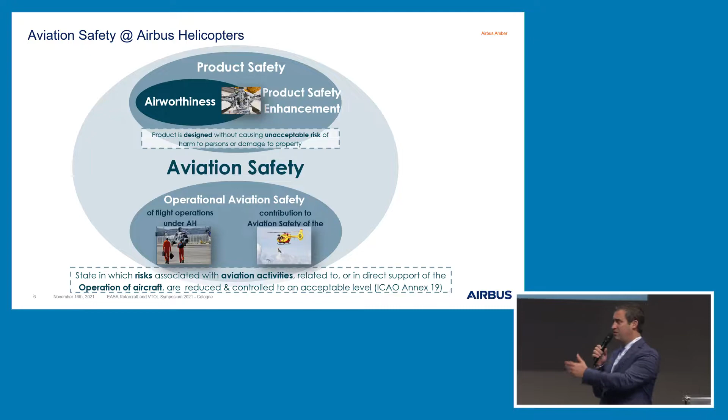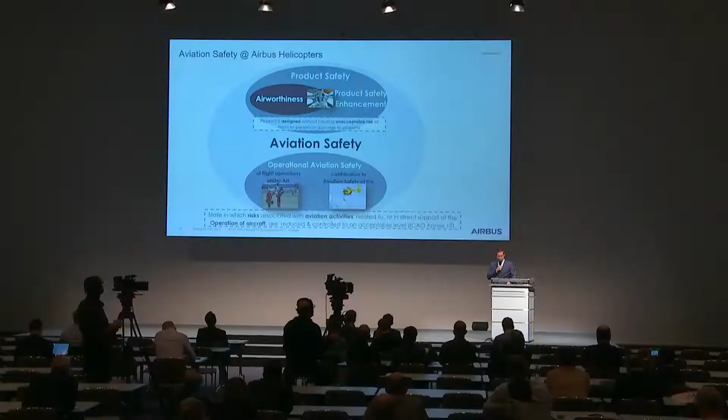We have started company-wide to deploy a safety management system over all approved organizations, as well in advance of the regulations which will come now as well for Part 21G and Part 145, or published. And this is really internally. And externally, to define a roadmap, how we could work with our customers and operators in the field.

If you discuss the strategy, you have to discuss as well your ambitions, your vision. In general, we defined five. In the center, Airbus Helicopters is worldwide expected as a leader in rotorcraft VTOL aviation safety.

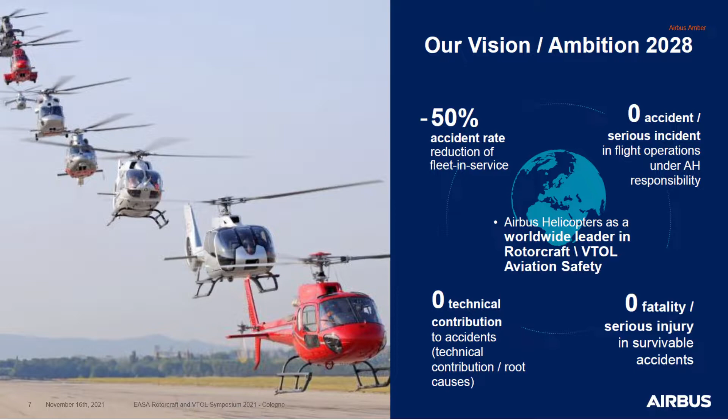One of the actions here is we are represented in the Rotorcraft Committee, in the European Safety Promotion Network Rotorcraft, in the Vertical Aviation Safety Team, and as well with our Aviation Safety Network. We have worldwide, in all 26 customer centers, aviation safety representatives who contribute regionally in safety activities. We would like to play our role in this game.

Then if you look at the other ambitions on the bottom side, the classical OEM responsibilities: zero technical contribution to accidents, so zero technical contribution and root cause. This is clearly our ambition for product safety. And zero fatality and zero injuries in survivable accidents.

Thank you, Peter, you mentioned the crash-resistant fuel system. It can't be that there are fatalities in survivable accidents. That is one of the reasons, and Peter shared as well a little bit our frustration, that we developed a solution for the market. We offered it without a margin and even put on top a training package to promote it.

And now we would like as well that every stakeholder in the industry takes the responsibility that we could contribute to this ambition. Then on the upper right, you see the zero accident and zero incident in flight operation under Airbus Helicopter responsibility. This is our ambition linked to our internal safety management system deployment.

And then you see here the link to the EASA roadmap, where it was said minus 50% reduction as well for aviation safety. So we translated that into minus 50% accident rate reduction of our Airbus Helicopter fleet in service, from the value of 2018 until 2028.

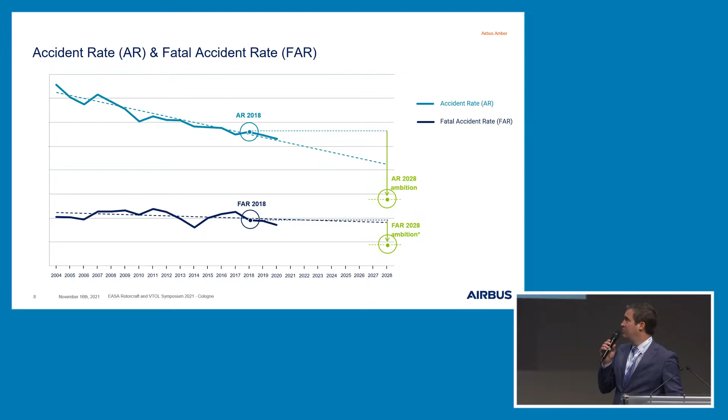Therefore, we have to have a look as well at our fleet. I think this is very general for the whole industry, not linked only to Airbus Helicopters: around 85% of accident root causes are linked to operations. This is a global standard. Therefore our target was that we don't need only to look at product safety, we have to look as well at how we could contribute to reducing these operational root causes.

Important as well is the fleet composition. 85% of our operators own less than 5 helicopters. We speak about more than 3,000 operators, and 65% of these more than 3,000 operators have only a single aircraft. We don't speak about complex organizations with a big safety management system, quality management system, and so on. So the challenge is really how could we get easy access to these operators and convince them to work together with us to improve aviation safety.

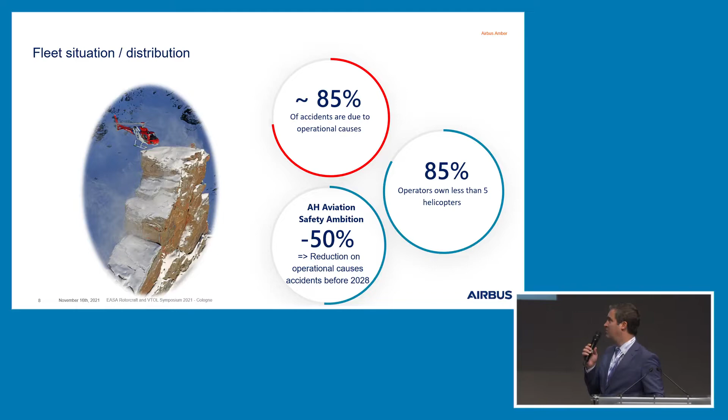And of course, to focus on the operational root causes to reach our target. I would like to show a short video where we started to think differently, as well regarding training.

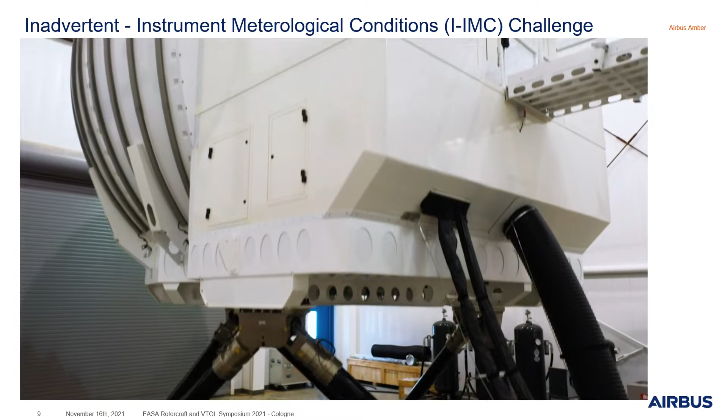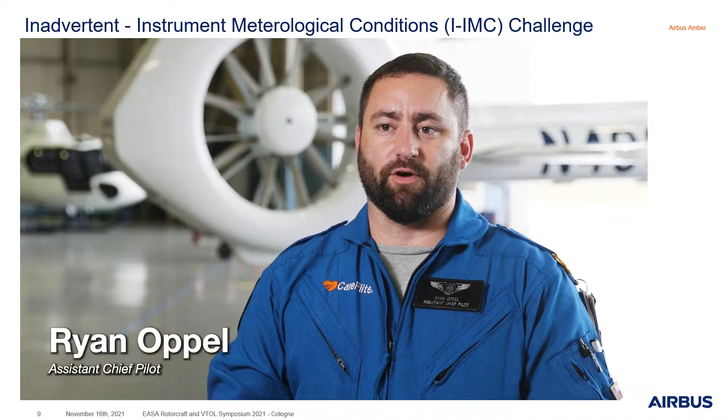IIMC is an inadvertent entry into an IFR environment. So I was planning to fly visually and I accidentally went into a degraded visual environment. The biggest dangers of flying into IMC are that you can possibly fly into terrain, fly into obstacles, or lose orientation. Unquestionably, some of the most fatal accidents involve inadvertent IMC, where a pilot was not prepared and was not in a position to handle the instrument meteorological conditions.

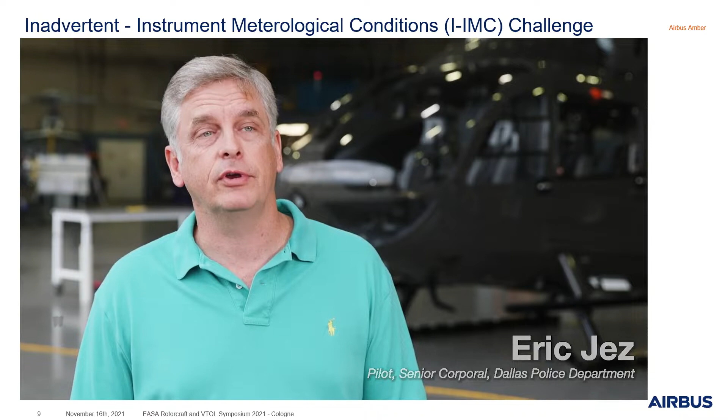Weather changes fast. It's clear one minute, next thing you know you're socked in with fog. And if you're coming back, you've got to get back, you've got to figure out how to do it safely. IIMC is something that can be a scary emergency, but can also be managed very, very well in the cockpit through the proper emergency procedures. And I think that's what an IIMC course would give you.

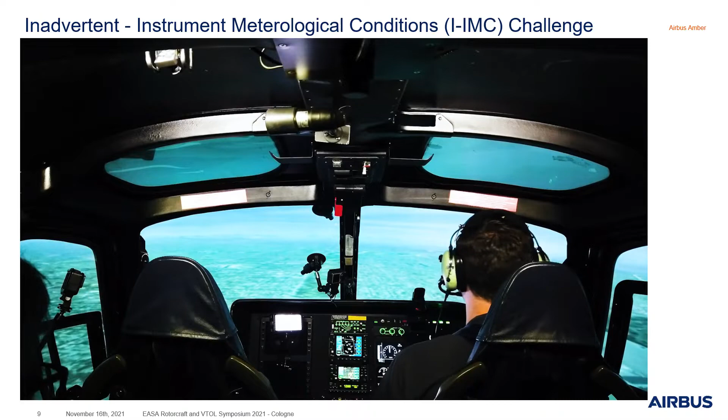The Inadvertent IMC course is designed to be aircraft agnostic, not make and model specific. Pilots that come for training have a wide variety of experience, all the way from the private operator to the professional pilot, oil and gas, EMS, law enforcement. The course consists of half a day of ground school and 2 hours of simulator flying split between 2 days. The challenge is we take a pilot, put him or her in the simulator. One of our instructors gets them comfortable in the simulator and then introduces a degraded visual environment to see what their reaction is when they go into that simulated inadvertent IMC event.

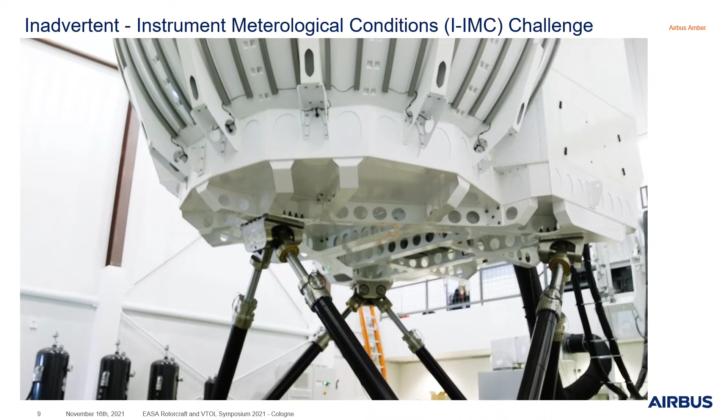Yeah, it looks like it's closed in a little bit. You can treat me as air traffic control if you need me for anything. Okay.

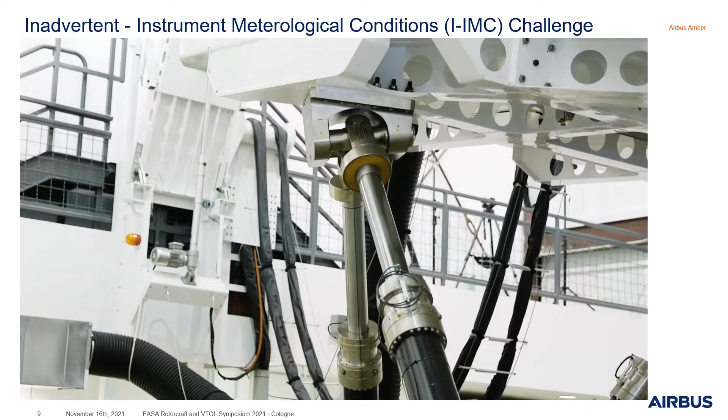I am definitely going into it now. That didn't take long, I've gone inadvertent IMC. I am a VFR pilot, non-instrument aircraft. When I went to IMC, I immediately got on the gauges and staring at that HSI, just trying to keep it somewhat level, and did a pretty poor job of that.

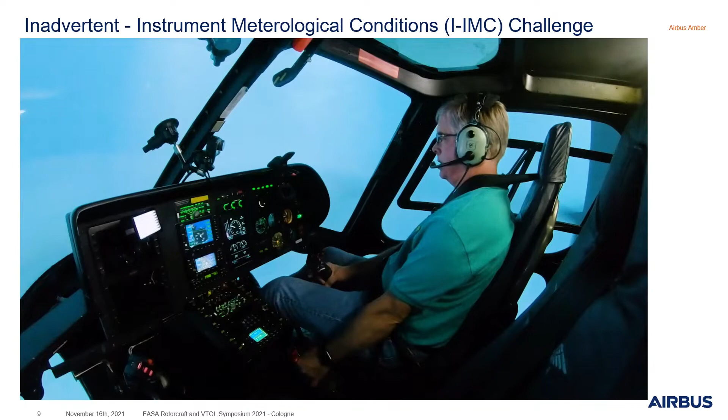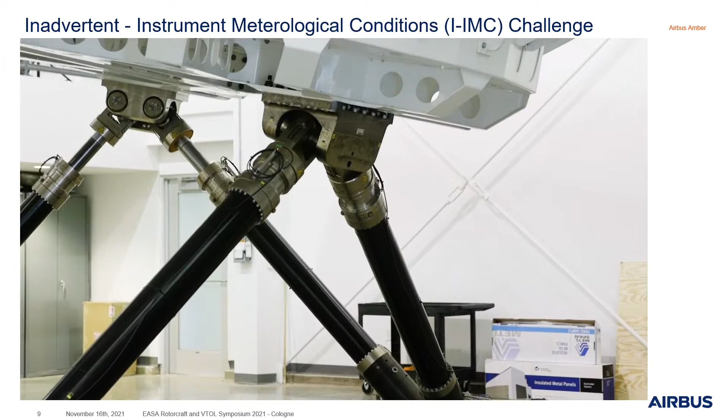That is not going to work out here, is it? Now I guess that's bad. This was an extremely valuable experience. It's not a big surprise. I knew, being a non-instrument pilot, never flying or having an instrument rating, it was going to be tough.

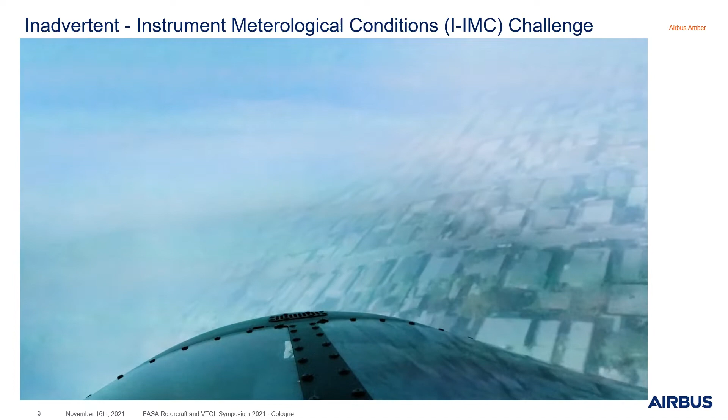You find out how fast it gets tough in there. I need more practice. After a while flying in that environment, if you haven't done it in a while, you just need to practice. It's a very perishable skill, and that's why I think the IIMC course is outstanding. The other thing I would do is install an autopilot system in my aircraft as soon as possible.

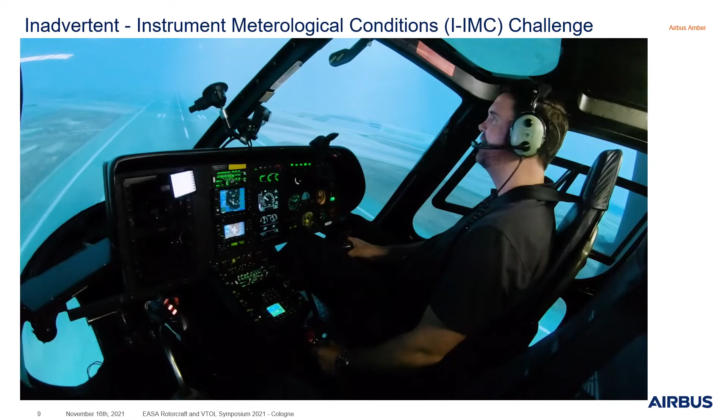Absolutely a valuable experience. It's nice to see when you haven't flown in this type of environment in a while, how you respond to your previous training and what you may need to work on in the future.

All right, now it really does start to look like I'm starting to lose some forward visibility. Trying to maintain my 1500, well, there goes my visibility a little bit more. Boy, I've just gone complete inadvertent IMC, so I'm going to level out here.

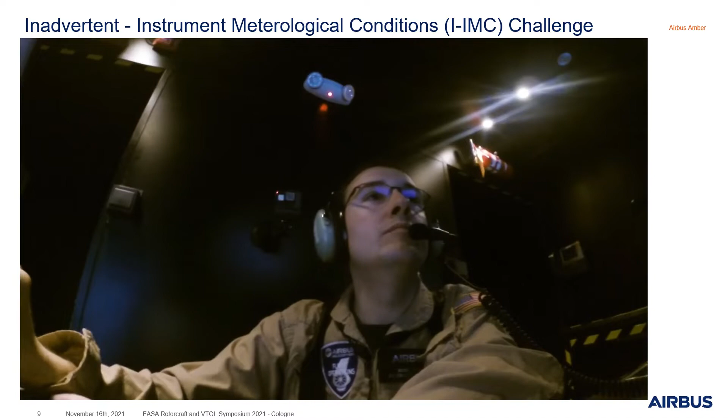Pilots learn about their limitations, the aircraft's limitations, in a high pressure situation. All right, we'll pause the simulator real quick. Let me take the weather out. Let's take a look where we're at.

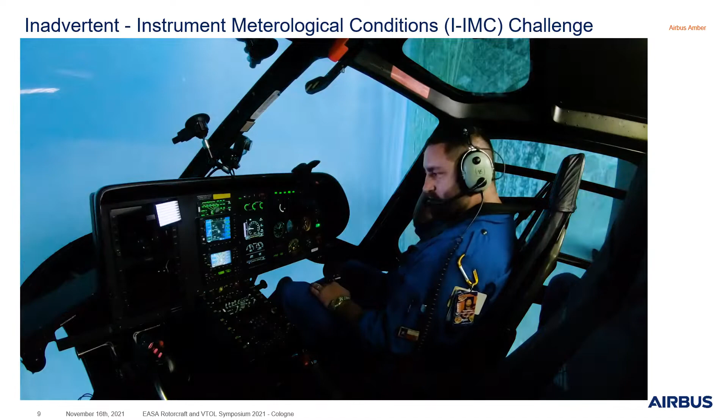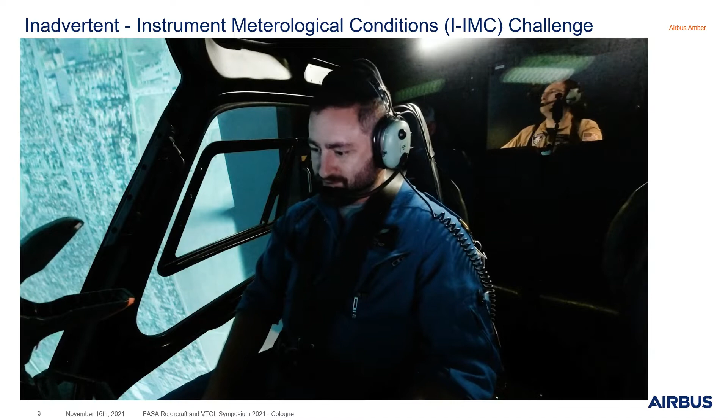That wasn't very good. It doesn't take very long for the aircraft to lose control. Not at all. This exposed some weaknesses that, due to the restraints and constraints in our traditional training environment, we simply can't replicate what we can in this environment in the simulator.

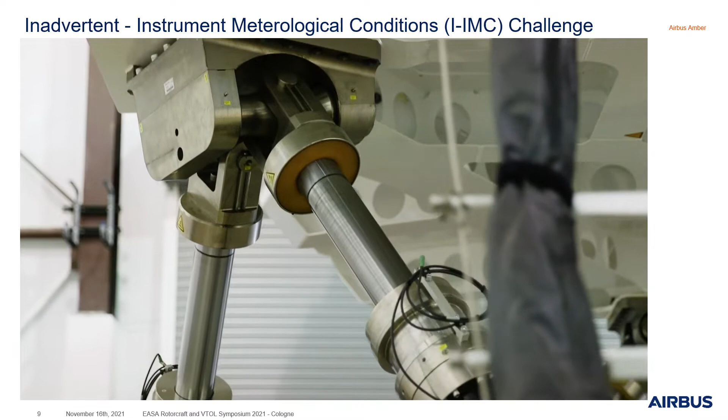Yeah, this was a very valuable experience because it shows that I need some more training, either in IFR training or IMC training. Holy cow.

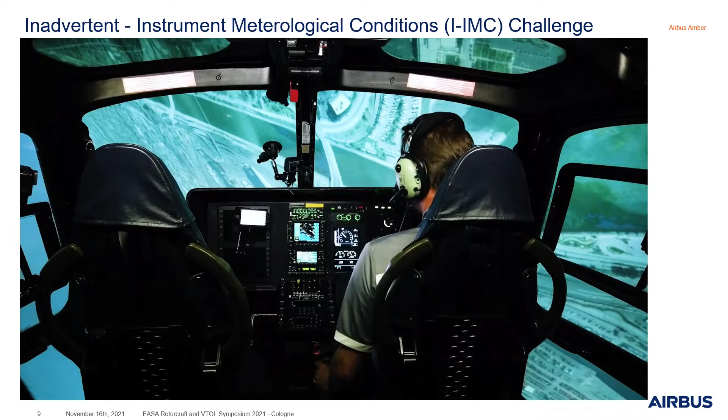All right, let's take a look at weather here. Hey, yeah, upside down, you're aerobatic. I know, holy cow.

People come into the course thinking that they might walk away with the skills and the confidence to recover from an inadvertent IMC encounter, but in reality, the course is actually designed to teach avoidance, how to avoid the situation, and then in the unfortunate event that you actually do experience IIMC, that you have the skills to be able to recover successfully.

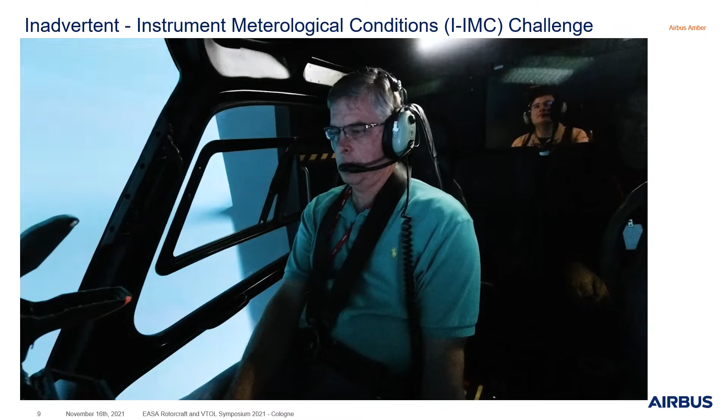Every pilot should have this training. No one plans to go into IMC, that's why it's called inadvertent. You don't plan on it. And when you go into the cloud, it's not long before you're completely lost. If you don't have any kind of muscle memory or plan to stay ahead of the aircraft, you're just not going to be in the air very long.

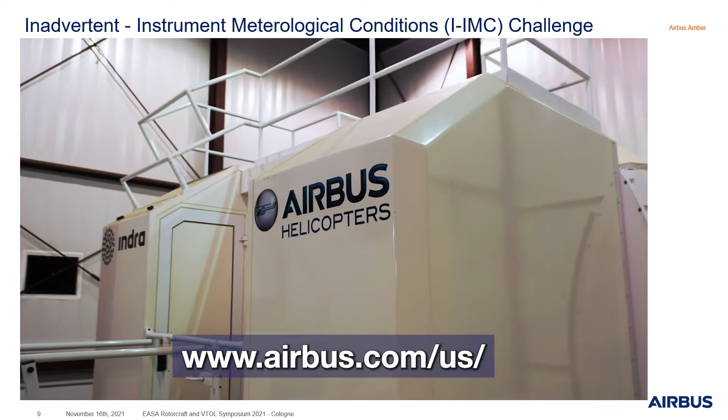This was to demonstrate to you one thing. There was an initiative coming from our US colleagues who said, what could we do in addition to our normal type rating courses? They created a syllabus like this, Inadvertent IMC, and we tested that together with our operators. And the customer feedback was so good that they have really put it into the portfolio.

And we all know that Inadvertent IMC, if you're not well trained, could be a killer. So it's very essential to work on this. I'm happy that I get the permission to pre-announce, because David showed that training is key, and as well training solutions. So I'm very happy that Airbus Helicopters, we are cooperating now with VRM for the virtual reality simulator. More will be communicated tomorrow, but it's a key part of our strategy regarding training.

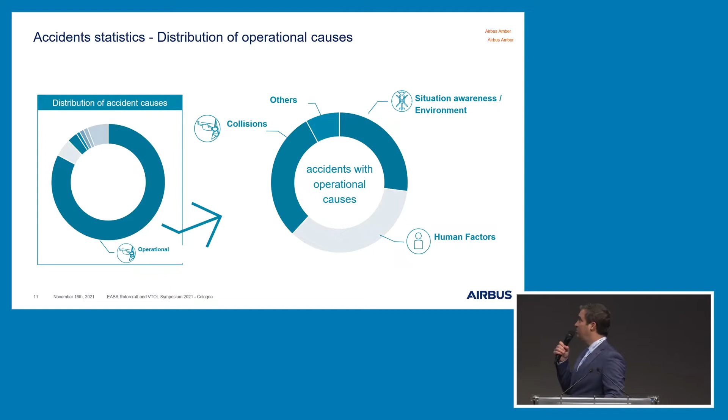When we look at the operational root causes, you see the main topics. Human factors, you see there is an issue there. The main ones are related to human factors, to situational awareness environment, like we mentioned, the inadvertent IMC, and collisions, like mentioned already in the presentation by David. These are the big challenges, and we said, well, let's focus on that.

For product safety, there's a strong link regarding product safety, because one is to design the solutions which are linked to the operations of the aircraft. And here, clearly, we push as well to go beyond the certification requirements.

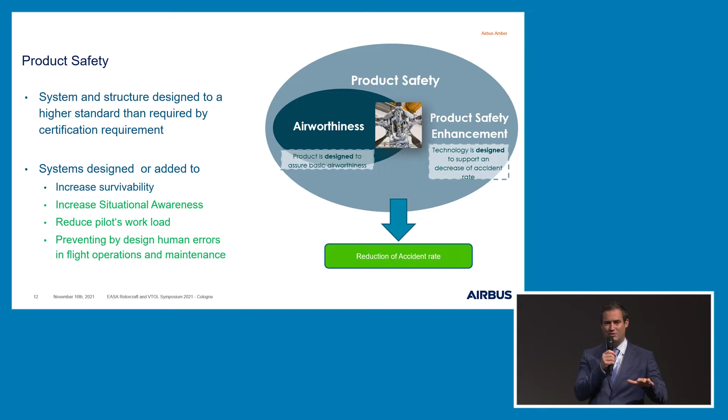When we look for the system design, there's an increase in survivability, but the other three dots marked green show a strong link to operational aviation safety: increasing situational awareness, reducing pilot workload, and preventing by design human errors in flight operations. Like James Reason, human error is not a root cause, it's a consequence. So we have to try to avoid that people could commit an error.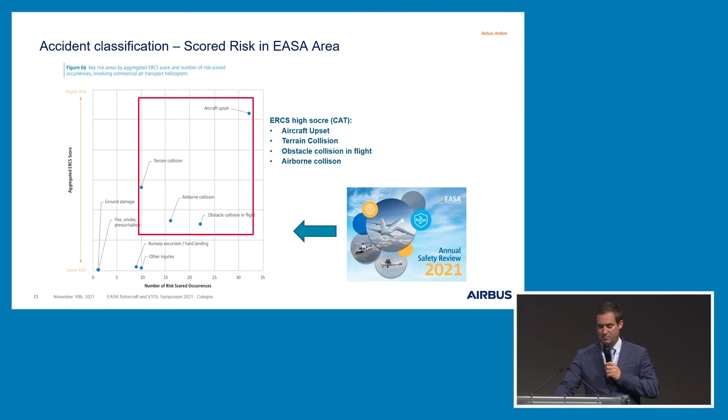When we look into the accident classification by EASA, you see these four high-scored points linked to aircraft upset—therefore inadvertent IMC training could be one of the solutions—terrain collision, obstacle collision in flight, and airborne collision. These are the aspects where we focus especially in our aviation safety strategy.

As mentioned in the EASA safety roadmap, data is key. Big data, everybody speaks about that, but now we have the technology to get the data. The aircraft are equipped, but we have to use the data as well. The health and usage monitoring system, HUMS, is not new technology, and it's a reactive approach, shown on the left side, to use the data for analysis.

But to use the data proactively, as is a target of the safety management system focusing on prevention, we have developed, for example, FlyScan, a service going into this preventive approach to get proactive alerts by vibration. There are algorithms behind it and patents already filed. It's a fault case matching, so there's already an opportunity to detect something in advance, with a service behind it depending on what the customer needs—a monthly report, a weekly report, a daily report, so everything is possible.

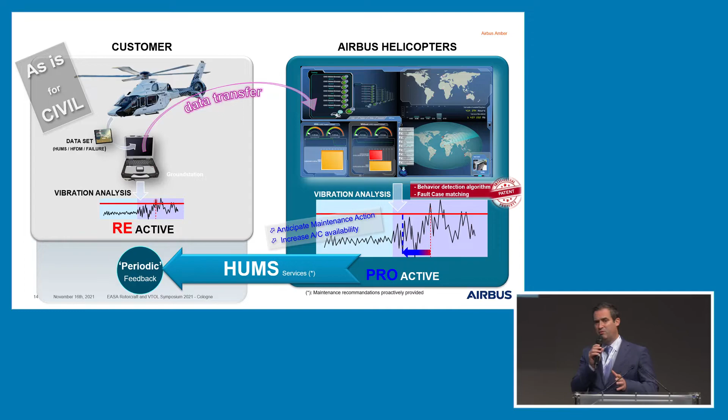At the end, there should be an advantage for the operation, mainly to anticipate maintenance actions—you see that something needs to be done—but also to increase aircraft availability. So the data is there; it's now just about how to design the services and algorithms to use the data efficiently.

Another focus, speaking about human factors, is maintenance. Maintenance is the second highest root cause for accidents—roughly 6% in the EASA area, I think, of root causes for maintenance. In the FAA area it goes up to 20%, maintenance as a root cause.

There's a strong link between aviation safety and health and safety. If you speak to operators, maintenance is considered hard work—it's impacting the people doing the work. And at the end, it's about designing the maintenance work from the beginning to avoid human errors.

Airbus Helicopters developed, in the frame of HeliOffshore with competitors, a human hazard analysis. For the 225 and the 175, we analyzed around 160 sensitive tasks and parts, and gave more than 1,200 recommendations over 3 years for modifications in the documentation and in the way we do things, and so on.

This is a great opportunity, but what's important here is prioritization—we focus on sensitive tasks and parts, and estimate the effort involved. In companies, around 20% of health and safety accidents are related to maintenance tasks. So this is a subject linked not only to aviation safety, but also to health and safety aspects.

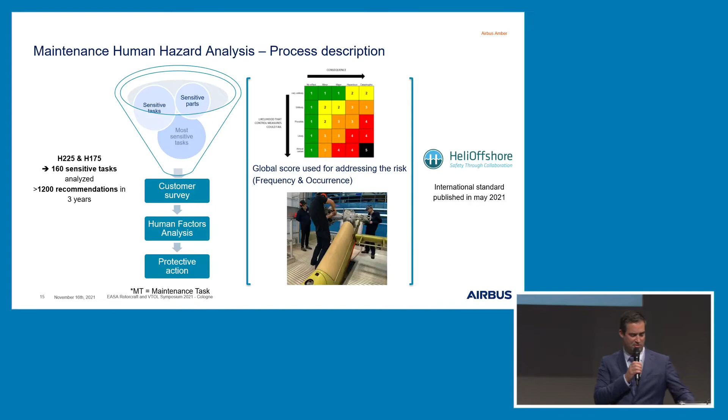I think Peter already covered most topics regarding the crash-resistant fuel tank, but I'd like to mention it here as a contribution to product safety. We've developed STC solutions for all the H125 and H130 variants for retrofit. All new aircraft are delivered with a crash-resistant fuel system, but the challenge is to get the fleet retrofitted. The solutions exist, different ones, and are pushed to a competitive price on the market. Now it's really the responsibility of the dedicated owners to decide to retrofit or not—but it's a question of survivability and a significant improvement for safety.

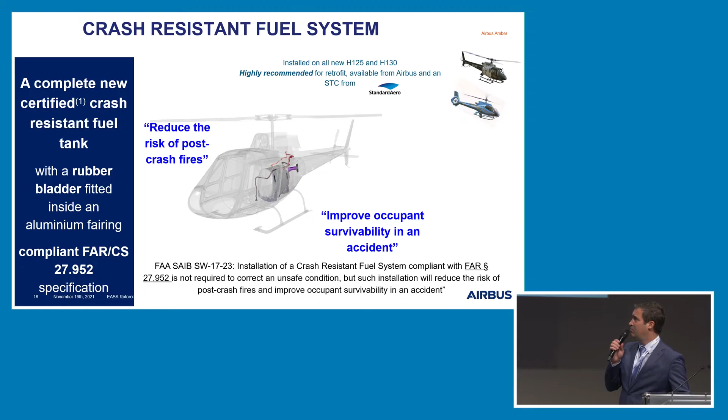Another subject is to focus on light helicopters in our safety roadmap. Light helicopters are the biggest part of our fleet composition at Airbus Helicopters, but also very often the drivers for accidents. And as mentioned, 65% of customers have a single aircraft. So if you want to improve safety significantly, we have to target them, which is very difficult.

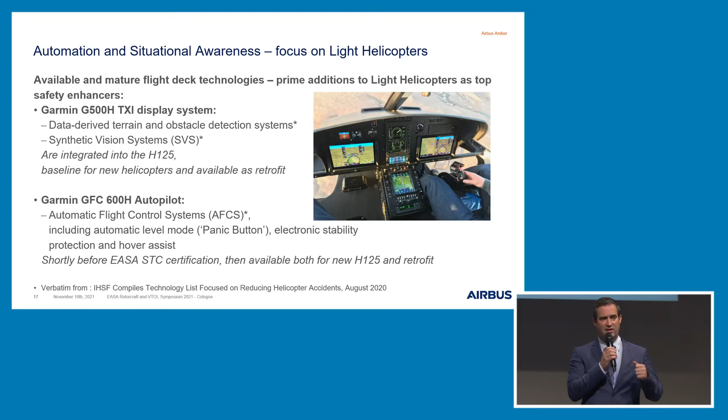But we have to provide them with product safety solutions that help. For example, the Garmin G500H solution, which allows for synthetic vision systems and an obstacle detection system linked to that. And very important, the autopilot—a simple autopilot already for light helicopters, with people calling it the panic button, for automatic leveling. So if someone gets into a situation where they're losing control, they have the possibility to stabilize the aircraft with the autopilot.

With the H160, we certified for the first time, linked to our Helionix avionics suite, a vortex indication. On the left side there is a pre-warning if you are going close to entering a vortex situation, but if you are in a vortex condition, there are concrete warnings as well as procedures provided on how to get out of this vortex situation. We just recently published a safety promotion note regarding vortex.

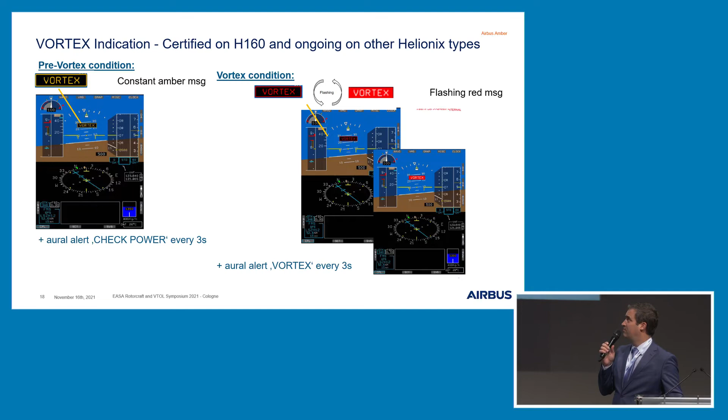There are many other aspects we would like to focus on. I don't like to say we have to think out of the box, maybe it's to discover all corners of the box, to see what possibilities we have to provide solutions improving safety. You have seen already the video for Inadvertent IMC, to think about new technologies to do training differently. At the end, we have to bring training to the customers.

Preparing and offering pre-entry courses. We recognized that the maturity of customers coming to our training centers is not at the same level, so we developed pre-entry courses to bring them really onto the same level before they go to training and simulator centers around the world, but also to look for other solutions like virtual reality simulators.

In the frame of the EASA Aviation Partnership Program, we have launched a lot of safety roadshows in different regions of the world. For example, in Nepal, we have the highest accident rate in our fleet, far above the standard, and we launched in 2019 a safety roadshow especially there with the Nepalese operators, together with colleagues from EASA and experts, to come close to the operators and work together with them to see how to improve safety in this region.

Another subject, for example, the ground rescue booklet - we have developed an e-learning, all free, available on the homepage, to teach people on the ground in using our aircraft. For example, we very often have hospital crews, fire department crews, and so on who would like to be trained. We received good feedback on these solutions, that they could get familiarized with the dedicated aircraft types, and that they could train their teams for emergency response plans.

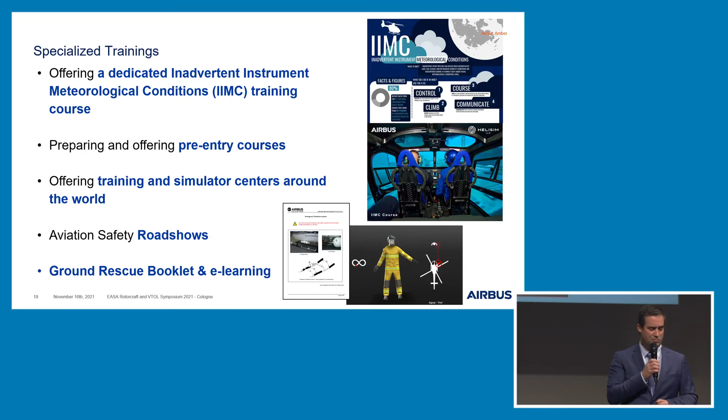As a conclusion, this was and still is our challenge: to see how we could translate the EASA safety roadmap into concrete means, feeding our aviation safety strategy and roadmap. So we put that in the standard process - we have a process to evaluate the top safety enhancers, linked to the net safety benefit approach, but also to think differently, to see where the hotspots are.

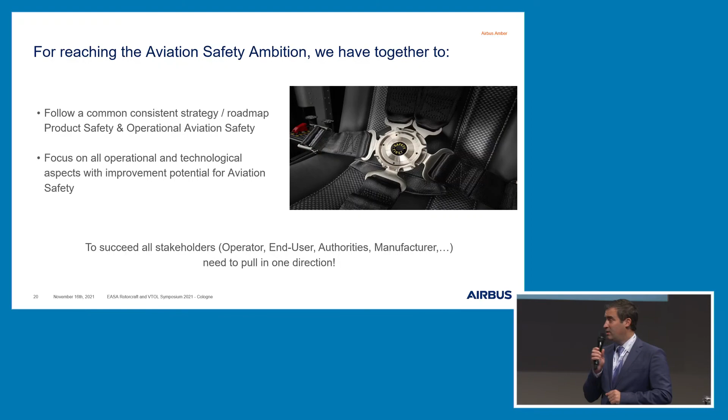I think in the past we had not already asked what is the priority - is it really bringing the highest benefit for reaching our ambitions? But now we do that systematically. If there's an idea, we check what the contribution is to our ambitions, the five, and what we could put in place. Important is, like mentioned already by Peter and David before, the cooperation.

I think we all together as an industry have to challenge ourselves in our responsibility. What could we do differently? How could we contribute the strongest on our overall journey for aviation safety? And here, aviation safety is not a topic about competition. We are working in the ESPN-R together with colleagues from Leonardo, with Bell on the OEM side, but as well operators who are normally competitors together.

Because for aviation safety, there should be no competition. And if we want to make this industry safer, we have to work commonly and pull in the same direction. So don't hesitate to get in touch with our expert teams from product safety, airworthiness, or our colleagues at the booth. If you want to discuss more about aviation safety or have concrete questions, I would like to invite you to come to the booth.